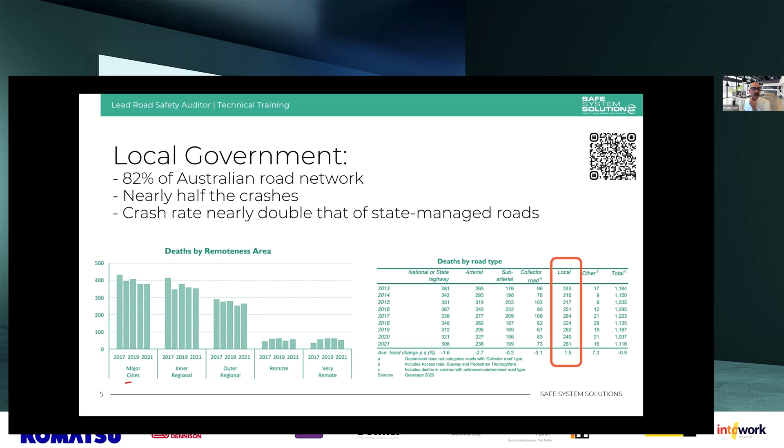Okay, let's get into the top 5 straight away. I've told you a bit about how we've done this analysis. The other thing to note is that while these treatments address the systemic risks on the local government network, we've also overlaid the real desire we have as a community to increase active travel and more sustainable travel, people walking and riding. That's especially overlaid into these urban treatments we're about to show.

At number 5, I'm going to show you one of the risks we're trying to address here. Hopefully that streamed for you - I'll play it again in case it didn't. Katie's giving me the thumbs up, but you saw that. Very scary footage there of a dooring incident. I mentioned my colleague Max - we were out doing a cycling audit around Melbourne. He had the 360 camera on videoing, and I just happened to have to avoid one of the doors myself there, which for those who ride a lot is a common occurrence.

This is only part of the systemic risk we're talking about for cycle lanes - roads with traveling vehicles next to the cyclist. We also have concern about vehicles drifting into cycle lanes or hitting cyclists one way or another. These risks combined are a serious safety concern, and they also discourage people from getting out and riding, especially those less confident in riding - these things really discourage that.

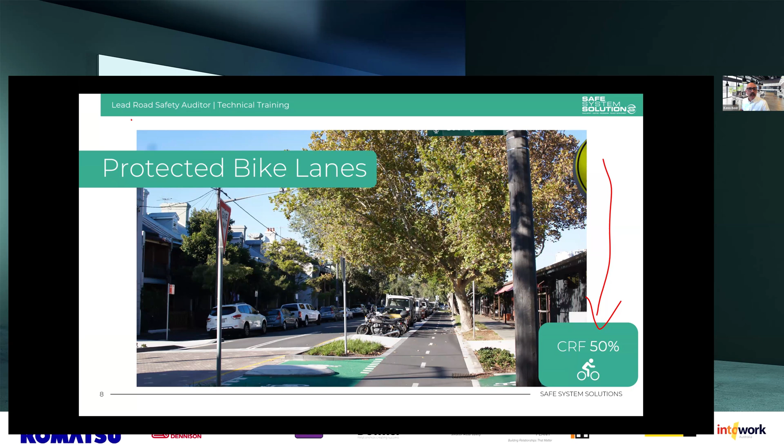You can't really do a crash reduction factor off just one data point—your statistical significance isn't quite there. So a 50% crash reduction factor for protected bike lanes, as I say, will vary depending on some specifics.

But the way you can do that varies. You can see here some concrete blocks used to separate riders from faster vehicles, also including the parking in this sort of Copenhagen-style bike lane where the parking is pushed out, so cyclists get to run curbside and away from any of that risk.

In the specifics of how you design these, there's all sorts of things to consider. Certainly intersections and access points are a real area of risk, and those need good sight lines. There are other little tricks, such as putting a raised surface or cobblestones at any turn-in point—there isn't one here, but I'll show you. This can really enhance that point, so a vehicle turning in has to significantly slow and hopefully then see riders as they approach.

Two-way Copenhagen lanes don't tend to operate as safely as single direction ones, just because of that surprise of a cyclist coming from the other direction for a driver turning in. But if you have long lengths without access points, these can be a really good treatment—especially if you're constricted on road width, since you only need the buffer on one side rather than both.

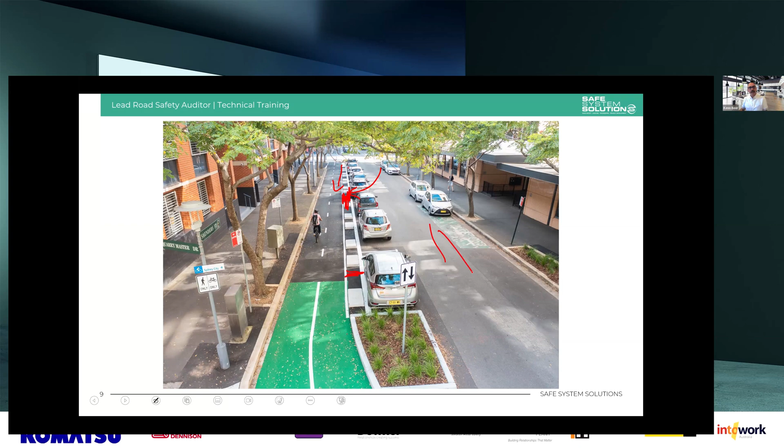There are lots of different treatments coming in. I had some wonderful discussions with Michael Langdon up in Queensland, who many of you know, about exactly where we draw the line and define something as a physical feature separating a bike lane or not. Michael's going to put out some information on that shortly, I think, because it is a little bit grey.

I'm really interested in some of these bolt-down features—quicker to install, lower cost ways of doing it. It can also be a way to get your community comfortable with it. We know some people might be concerned, so you can put it out as a trial, spiked down, and they're a little more comfortable knowing it could be removed if it's not performing.

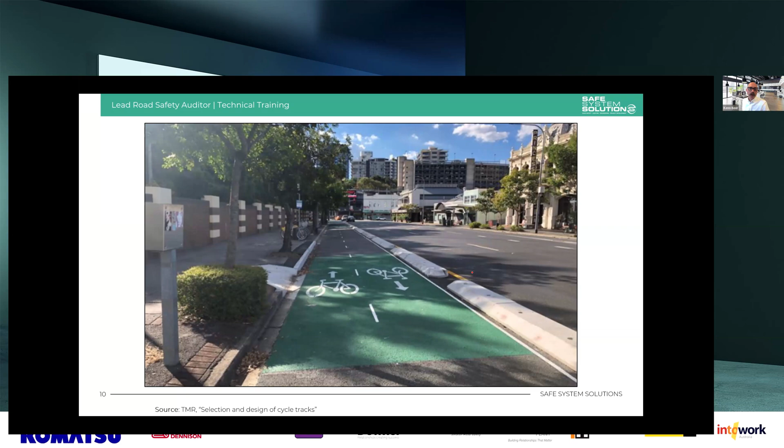These pop-up treatments we've been seeing, this is obviously a larger arterial road, but the idea is to start putting up pop-up infrastructure, significantly increasing cycling and safety perception as well. There's also opportunity to do some landscaping and beautification using different planting or the like.

Again, it's a bit about getting your road safety auditors involved and thinking about snagging and things like that, so working with landscape architects to make sure we've got a really safe design in there as well.

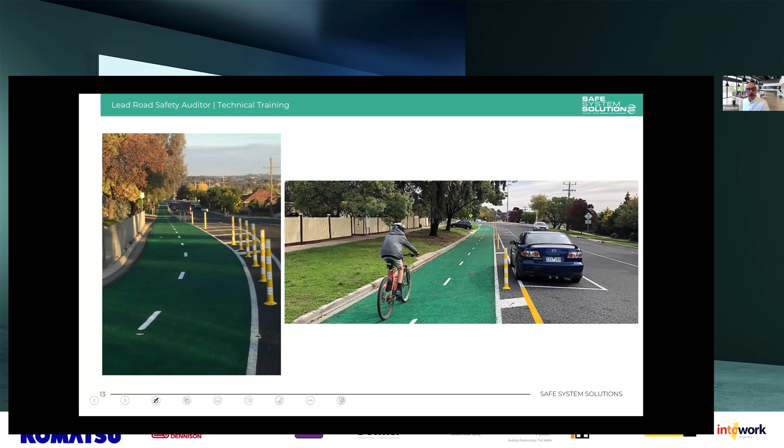Another wonderful example from Bendigo showing that you can take roads that have generous cross sections currently and are car dominated, and rearrange them to provide wonderful separated facilities for cyclists, getting more people on bikes in a much safer environment.

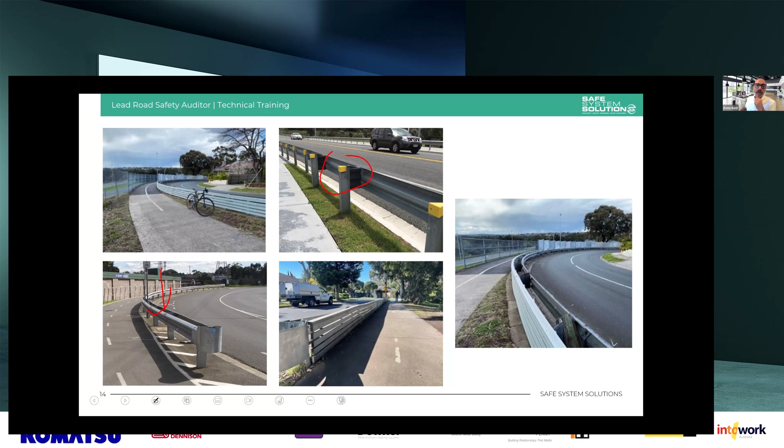If you use barrier systems to separate as well, that's a really wonderful treatment. I just want to flag the back of a W-beam system—there are many different types out there, but the back of a W-beam system can be a snag hazard, a sharp edge for a rider if they had to leave the path for any reason. So things like backing boards, a back-to-back W-beam system, or post capping as a minimum if you're doing that. But really, some of those back-to-back systems can work really well.

Okay, and at any point, Katie, you can jump in with questions if you have any.

Nothing's come through yet, Ken. Well everybody, feel free to pop your questions in the chat as we go—I'll see how many I get to in the time we have allowed, otherwise I will be able to follow up.

Okay, the next one I'm going to jump into here—another video showing the risk in action. Not to say we wait for crashes, but we're seeing these crossroads. Now these crossroads occur, yes, in urban environments, but also in lots of local government and rural environments as well, and we have bad angles.

We think about the angle of crash a lot. We have bad angles, we have bad speeds. There's a whole lot of looking into why these are occurring in terms of: are there see-through effects? Are there appropriate warnings? Is the signage good? How's the skid resistance, the surfacing, the line marking, and all these sort of things? Really important to be looking at and doing everything we can to minimize the chance this happens. But we do have to focus on the severity of the ones that are still going to occur, so we're going to try and minimize those crashes, but what happens when the crash or the mistake happens?

This is where I'm going to go to one that's not new, the old roundabout. The roundabout is such an amazing road safety feature when we think about that vehicle-to-vehicle collision risk. It also works really well for motorcyclists - not quite as good as cars, but really effective for motorcyclists as well. We give a crash reduction factor of somewhere around 60%, could be a lot higher than that just for cars, depending on whether it's a one-lane roundabout versus a two-lane roundabout, and how it's all configured.

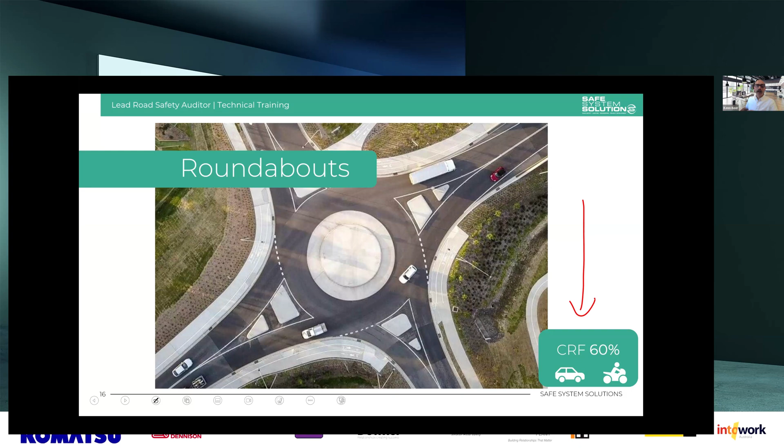I'm going to talk about pedestrians and cyclists at roundabouts a little bit later, because that's definitely something we need to work harder on. But in those areas where there aren't pedestrians and cyclists, out in your rural areas, or where there are fewer pedestrians or cyclists, just a generic roundabout is an absolutely amazing feature.

And why is that? Well, a bit of road safety engineering 101 for you here. Conflict points - a conflict point is a spot where the crash can happen, so you've got two vehicle paths that cross. You can see for vehicle-to-vehicle crashes at a single lane roundabout, there are just fewer conflict points. And the conflict points that are there are much friendlier - they're not those very harsh angles that can occur.

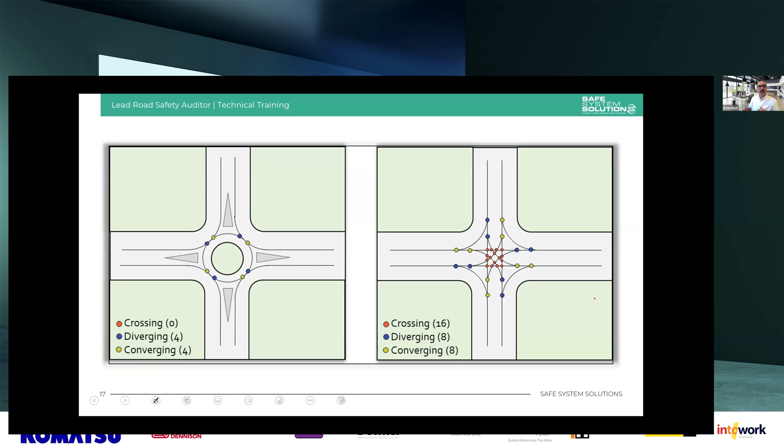So when people crash at a roundabout, there's a little bit of bouncing off going on, as opposed to a very harsh crash at speed. If you remember your vectors - I do a little bit of vectors with people in our training courses - but anyway, the resulting energy is dissipated outward more than it would be otherwise.

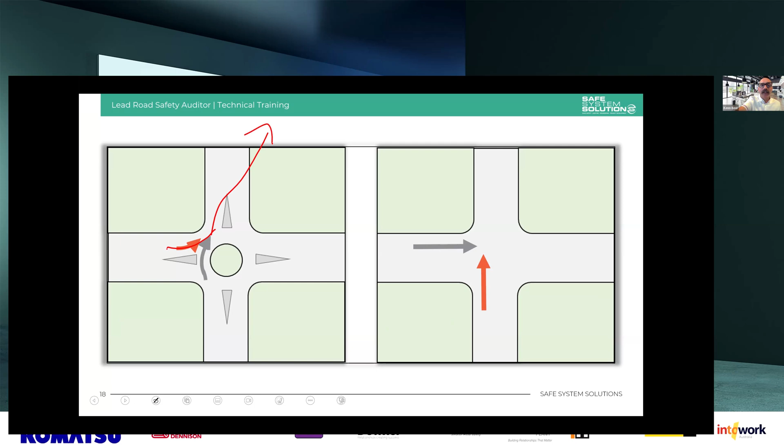The other thing is that people drive in all states of consciousness. They're half asleep, they're thinking about the fight they had with their partner, they've worked a double shift, maybe they've had a drink or two, they're just not concentrating. They will run straight through a give way sign or even a set of traffic signals, but they're far, far less likely to run straight through a roundabout. It's just got all these characteristics that wake people up, bring them back to driving, make them look around at a particularly high-risk spot. So that's a wonderful win in road safety.

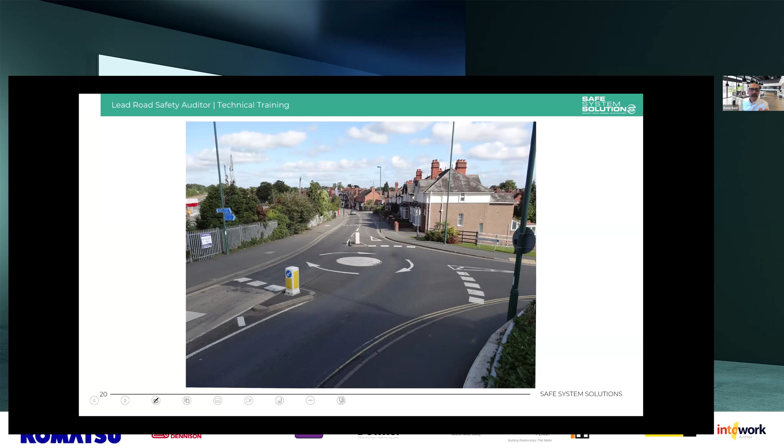And even roundabouts that are much smaller, and don't necessarily have those particular civil infrastructure features in the middle, do an amazing job disrupting ultimate priority. So a driver approaching from any direction at this UK mini roundabout, for example, will not think they can run straight through at speed, because they're going to have to at least look around. They might go through a little faster than we'd like, because we don't have as much horizontal deflection - we can work on that with some other ways - but that disruption in ultimate priority is an amazingly effective feature.

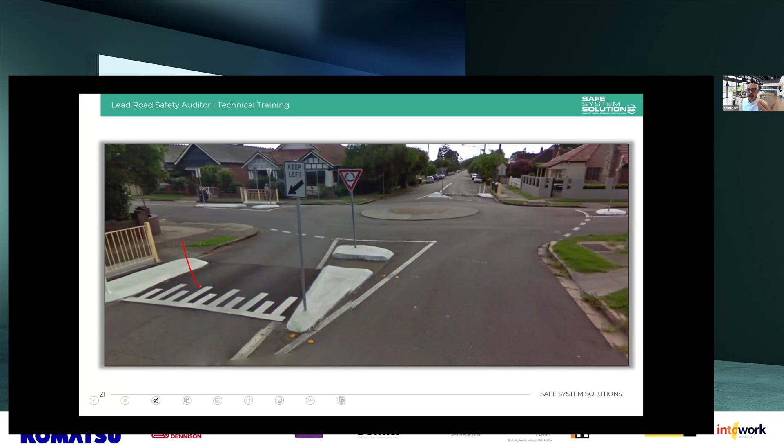And then the roundabout goes in, essentially with very minimal works - a wonderful feature. Cost under $50,000 at the time, probably a little more expensive than that now, but we're not talking about those sort of $500,000, $1 million - or if you get onto the arterial road network, you're up at $7-10 million, no worries, for a full-size roundabout, which is an extreme amount of money when we think about the number of areas we could treat for something like that. So there's another little bit of the compact roundabout - you can see some important features there, such as features to slow vehicles on the approach to the roundabout as well.

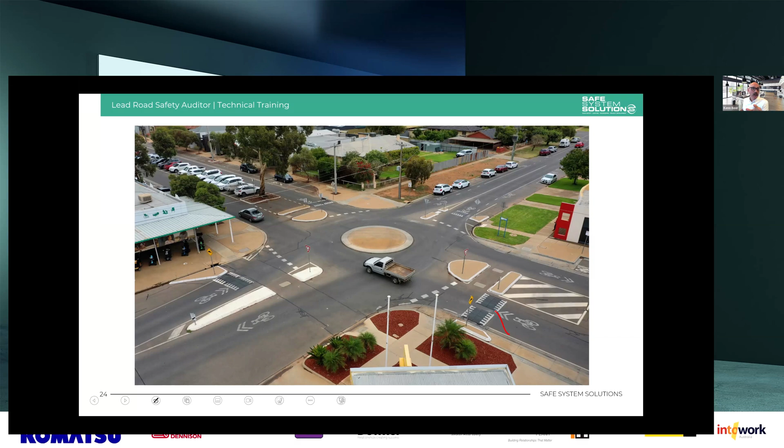I mean, this is kind of like the US four-way stop, just with a circle in the middle and a bit of speed calming on the approach. It's really what it is, but it's a spot of higher risk where people have slowed down, they're more alert, they're more awake. This one actually performs really well for pedestrians and cyclists as well, but I've got some other things to throw into the mix on that a little bit later on.

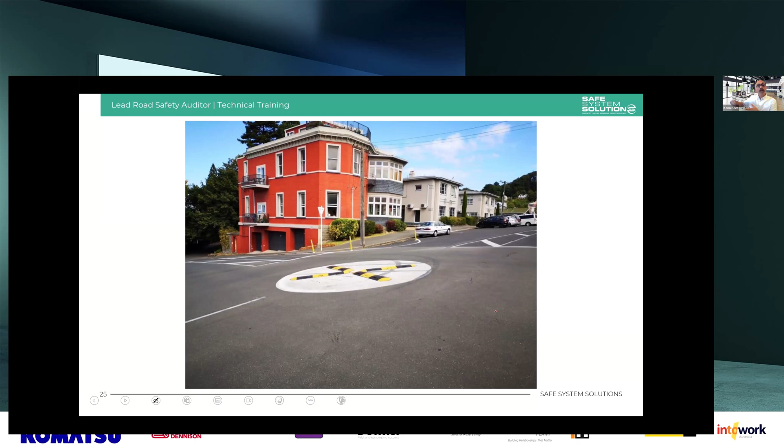Does it meet all of our design standards and performances and everything like that? No. But you really got to ask yourself, are we getting a safer environment for all road users than not doing this at all? And if that is the case, we are obligated to move this through in the best possible way we can. So lots of good features coming out.

Okay, at number 3, and now this one, I'm going to give you a little bit of an analogy to start you off here.

Got a high-rise building. Falling from the high-rise building, or let's push a car off the high-rise building. From the first floor, when they hit the ground, they'll be traveling at 30 kilometers an hour. Up on the next floor, we're at 40 kilometers per hour. We jump up a couple of floors to 60. It starts to spread out a little bit, 70, 80. We're up at around the 13th or 14th floor at 100 kilometers an hour. Okay? So that's just trying to bring us speed to energy to death potential. Get that mix in our head.

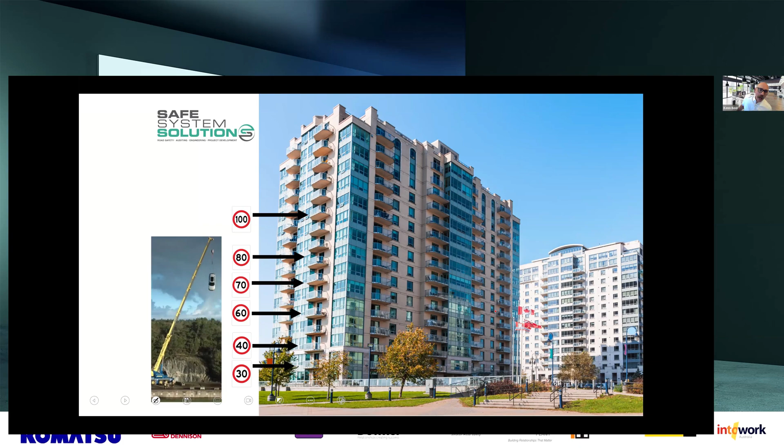Humans are really, really good at understanding energy and risk associated with falling from heights. Very, very bad at it on the horizontal plane. We just never evolved to understand that you could travel at 100 kilometers an hour. So our understanding of that risk is warped. But when we just put it on that vertical, okay, that makes a bit of sense. So we better just drop a car from, say, there around that floor, just to show you the impact force. There you go. But let's go up to the 14th floor, shall we? Oh, actually, before I do that, I'll show you a bit of side impact with poles.

Another interesting misconception is the amount that the vehicle can handle in terms of force. So you'll see the bottom video going sort of slow motion there. That's the ANCAP side impact pole test. So this would be the equivalent of pushing a car off the first floor and having it land on a pole just before it hits the ground. Okay, that's at 30 kilometers an hour. You can see the intrusion into the cabin, to the driver's area, 30 kilometers an hour.

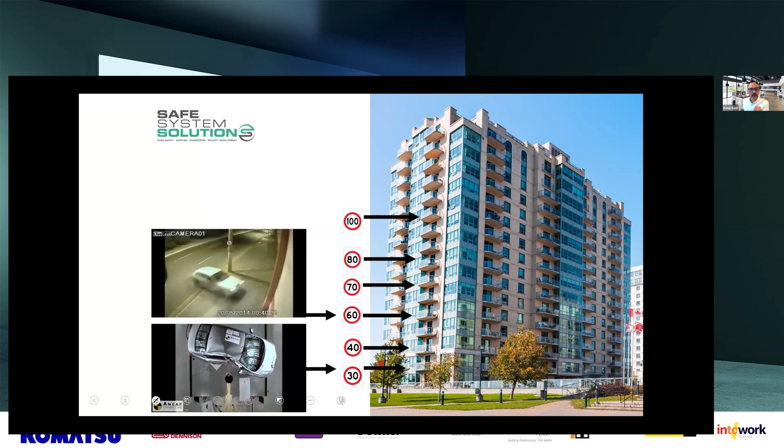If we do one at 60 kilometers an hour, and I sort of warn you now, this is a very violent incident you're about to see. At 60 kilometers per hour, the amount of energy and violence in that crash with a point source hazard is absolutely unsurvivable for the occupants of the vehicle. The best chance at survivability in these is that the car is ripped apart and that occupants are lucky enough not to be in the direct line of that pole as it slices through the vehicle. That's only impact speed at about 60 kilometers an hour. I shouldn't say speed limit here, I should say impact speed, by the way. People recognize that quite well.

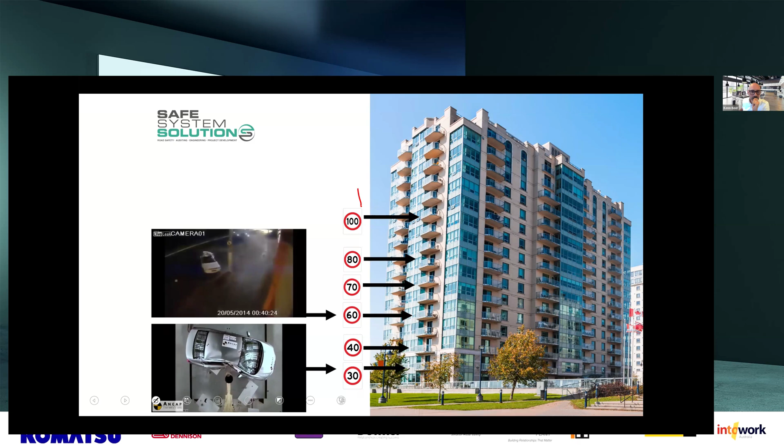60 kilometers an hour. But let's go up to that 14th floor, as I said. Okay, and so we've got a balcony on the 14th floor. And we don't say to people, okay, don't fall off the edge. And we don't put a white line there and say, okay, everybody always stay this side of the white line, because the forces are just unsurvivable. Humans are going to potentially fall off that.

We put up a railing as an absolute, because a fall is unsurvivable. We're going to do a physical railing here. We're going to try and make sure people don't walk out there and do too much of that, but the railing is absolutely essential.

I think you see where I'm about to go with this, which is to say that when it comes to a roadside and we've got trees and even rollover risk for that matter, what do we do? We either say just stay on the black stuff, or maybe we put a white line there and say make sure you always stay on this side of that. So it's a fundamental rethink in the way we think about roadside and median risk.

And what we need to be thinking is in a very similar manner. We need that railing, we need that barrier system, so when people make that mistake, they hit a barrier system rather than falling 14 floors or hitting a tree or the like. It also applies for the middle of the road, where a head-on crash is unsurvivable as well. We've got to think of that line just like the edge of the building.

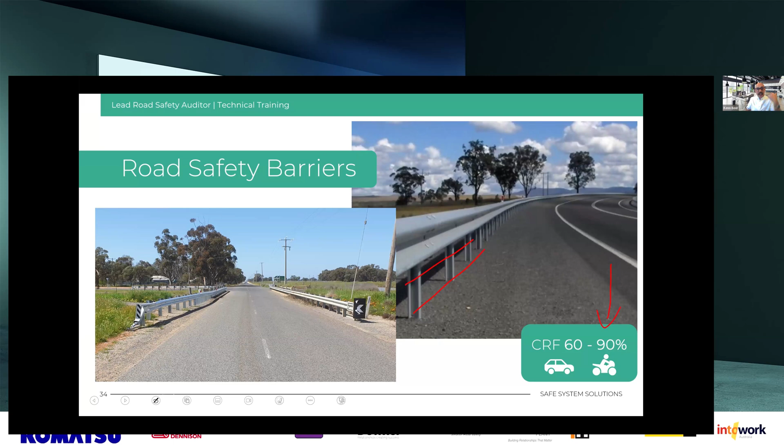Yes, it's going to cost a little bit more, and we can access a lot of government funding from state governments and federal governments for road safety initiatives, and putting forward barrier systems with these wonderful crash reduction factors makes a really good business case for that investment.

Now, just for the designers out there and those doing a little bit of thinking around roadside risk, I just want to flag the new Austroads Guide to Road Design Part 6, which does not follow clear zones. So if you're still thinking about clear zones, we're not following that in most jurisdictions. New South Wales is still following clear zone theory in terms of roadside risk, but I'm not sure what Western Australia is doing. I'm not even sure what side of the road they drive on.

And I joke, but I'm not sure what they're up to in terms of roadside risk assessment methodologies. Certainly Queensland, Victoria, South Australia are following the network roadside risk intervention threshold, which is a different risk assessment methodology for roadside risk. It has lots more science behind it than the old clear zone.

We talk about the significance of the hazard as well, in terms of it's very different to be hitting a pole versus hitting a building or hitting some frangible infrastructure. So you start to categorize the severity of the risk, the likelihood of the risk, and there's a bit more to it. It's a bit of a process, but it's something you should be getting your head around if you're in those jurisdictions.

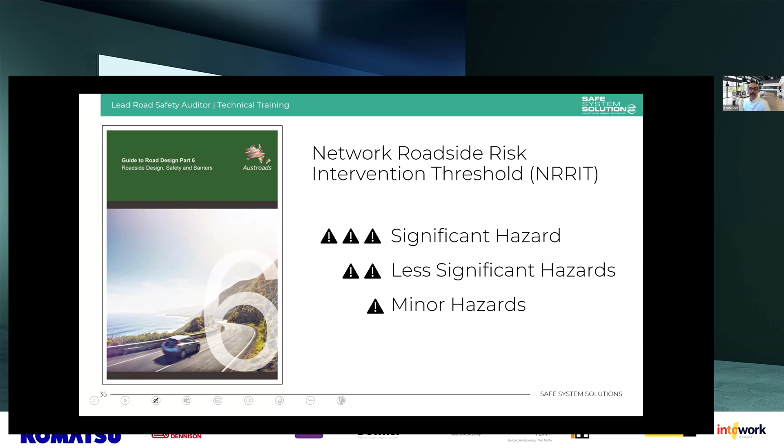I've got a couple of colleagues heading up to Rockhampton to have a chat with the council up there, do a bit of a training session on this process, barrier design, and start to unpack what this network roadside risk intervention threshold change means for Rockhampton City Council and how they can utilise this with the TMR requirements or adapt where they need.

Okay, going into number 2.

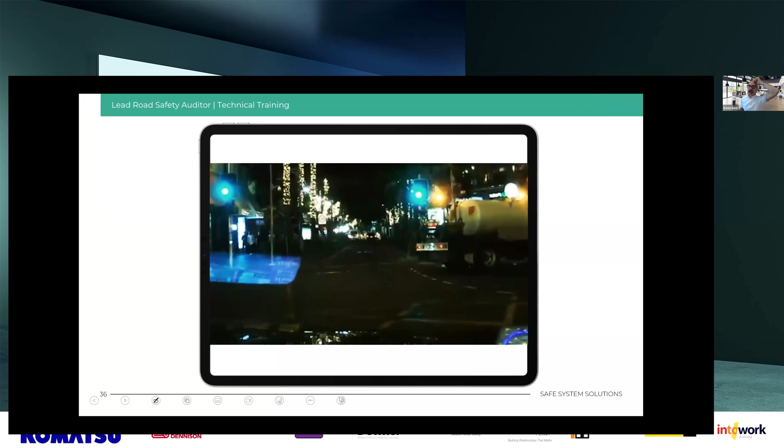Now, let's have a look at our little video here. Ooh. Okay.

So we've had a pedestrian make a mistake, as many pedestrians do. The vehicle is traveling at a low speed in a low speed environment. This is, as it says there, safe system in action.

We need to be absolutely clear that pedestrians will be walking on the road, making mistakes, running for their bus, intoxicated, trying to cross the road, pushing prams, walking around. That is what happens in these urban environments. And the motorized vehicle going through these environments needs to be at a speed where if something happens, it's well within survivable territory.

For far too long we've been in a blame culture of saying that pedestrian should not have done that, or they walked against the red. We're going to try to encourage people to be a little bit better in that perspective, but we absolutely need to get ourselves in the position of understanding it's going to happen, and our responsibility as those who manage, design and operate roads and streets is to ensure that when crashes happen, they're within tolerable forces for the human body, that it's not going to kill or seriously injure our community.

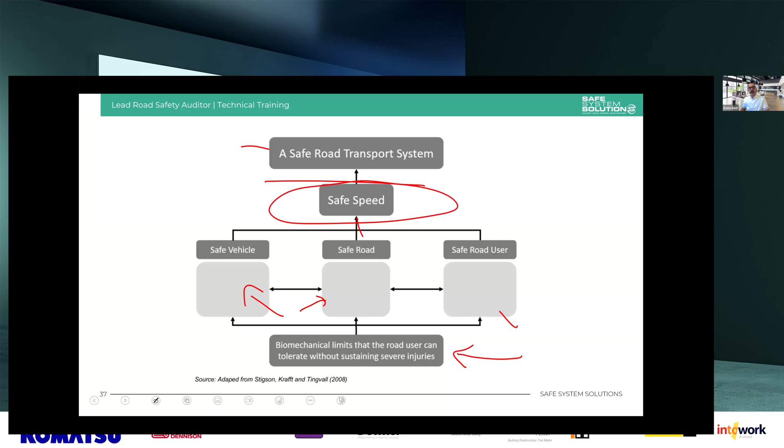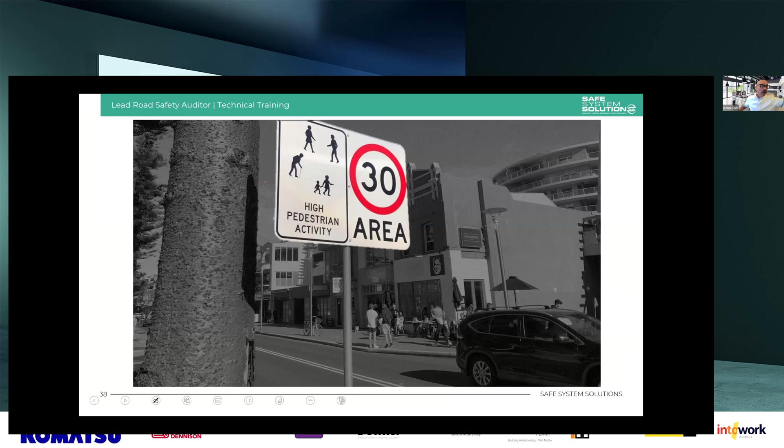Speed is the governor. So I've got area speed limits, and that's really what I wanted to put as number 2, is to think about area-wide speed limit reduction and getting that broadly across all these areas. I've got urban as an example there, but I also say that this should be applied to the rural network as well, thinking about whether we can manage risk across wide areas.

I'll pop this up because there are very tactical ways you can do this. Going one at a time at a speed zone reduction in an area with high risk is a real battle. And certainly you do that, and then you've got to get it through council, and you've got political pressures, and all sorts of community saying bits and pieces.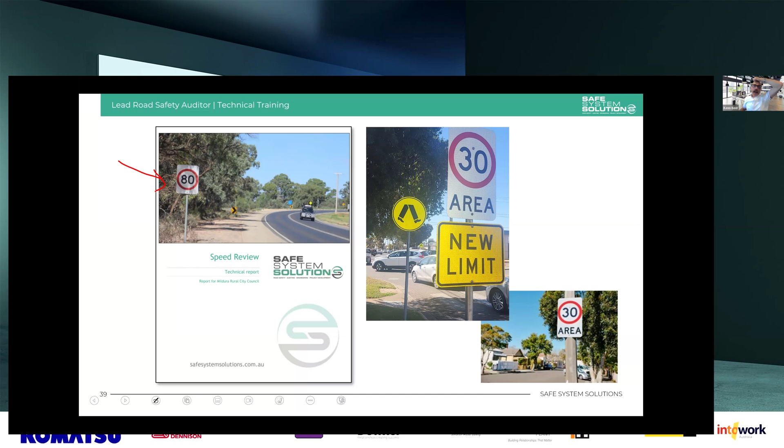And certainly it can be thinking about urban areas, and up in Mildura, the irrigation area, and then the wider rural network. You're able to start to map out, okay, we've got all these different risks, and this can be done with all sorts of methodologies, AusRAP, IRAP, IRR. Other people are coming up with different ways to do this.

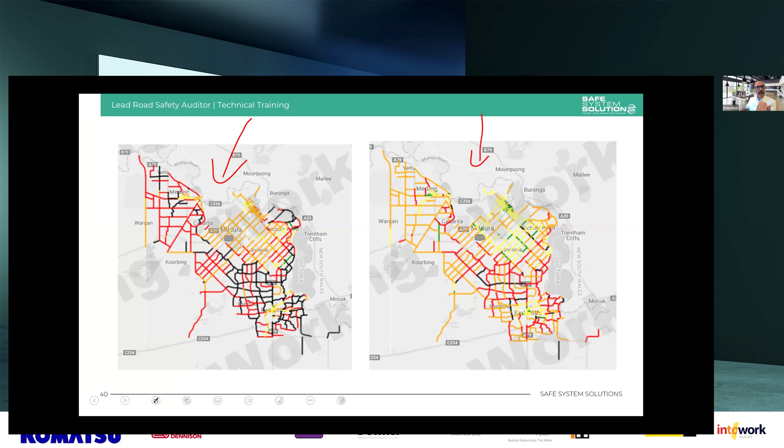So you can get a picture of existing risk, and then you can rearrange the speed zoning based on those risk areas, your movement and place categorization, and start to map out a future where you can see some significant risk reductions. We did that with the Mildura area, setting out some large areas for lower area-wide speed limits, and then looking at those irrigation areas and bringing them down from the default inappropriate 100 kilometers an hour down to some lower speeds.

And then you can take this through council. You need to set a platform for them to understand some of this, the risk associated with it, the benefits this will give in active transport. You get some of the community to advocate for it because they've got to walk on these streets, or their kids have to walk through these streets. They want to see this. You bring that sort of swell together. You can also even get your asset management people in, showing them it's actually going to cost less on some of this rural network with a little bit lower speed in terms of asset management.

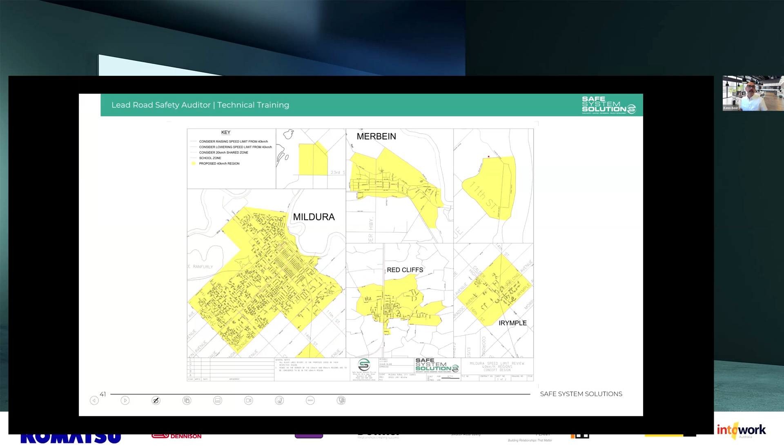We're going to take some people off running on our local government road because it's higher speed than the parallel arterial road. When we bring ours down, we'll move them to the road that's got the higher infrastructure, the big arterial road that runs generally parallel with it. So there's a lot we can do here, and we get wonderful road safety benefits, plus all the other benefits of more people walking, cycling, a healthier community, and lower emissions with these speeds as well. So it's just wins all round.

I'm really encouraging a lot of this 80 kilometre per hour approach in wide swathes of areas. I know some of the community aren't quite there yet, but Mornington Peninsula Shire Council paved the way for the last decade and more in this space.

They showed that actually a lot of the community do want these lower, more appropriate speeds on their rural network. It's just that if you go out to the public and ask, 'what do you think of us making this 80 kilometers per hour?' a lot of the feedback you get is that they don't want it. Why? Because the people motivated enough to write in are angry about this, they're motivated to do something. But if you do actual broad surveying of the community, random sampling, you discover you actually have huge support. Yes, there's people who don't want it, there's always people who don't want change, but there is a lot of support from them. They're just not those really vocal, squeaky wheel, jumping up and down people.

So taking that sort of survey data to your council can be an extremely effective thing to say, actually the bulk of our community want this. These people don't, but there's all this good to it, we've got overwhelming support, and here it is. Now you might be able to get those 30s to start with, but certainly area 40s are very well established across Australia and New Zealand. Even those have some wonderful benefits.

So the number 1, and I show this as what we don't like to see here. So approaching a pedestrian crossing, okay, a near miss there. It's a scary one. I'm going to play it again.

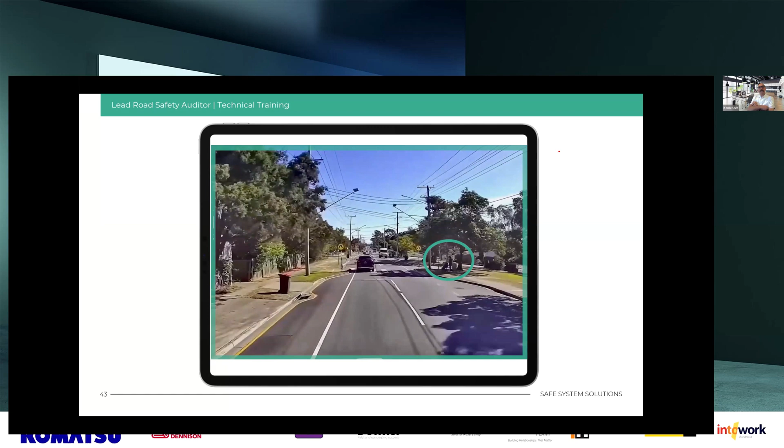Right, very scary. Now, the first thing I want to say is that a zebra crossing like this, a pedestrian crossing, officially called a pedestrian crossing, with no other features apart from the signs and the line marking, is not a road safety feature, okay?

It may have some benefits in terms of getting a few more people walking, but it is not a safety feature in the sense that we assign it zero as a crash reduction factor, sometimes negative.

Now, I predicate that on the fact that it's in these medium-ish speed environments. In very low speed environments, great, you've already got the low speed, general good safe area. These are fine crossings. But in these sorts of environments and high speed environments, as they sit in that photo, they are not a safety feature and can cause real issues where we have pedestrians who do have right of way walking out, and vehicles distracted, going at speed.

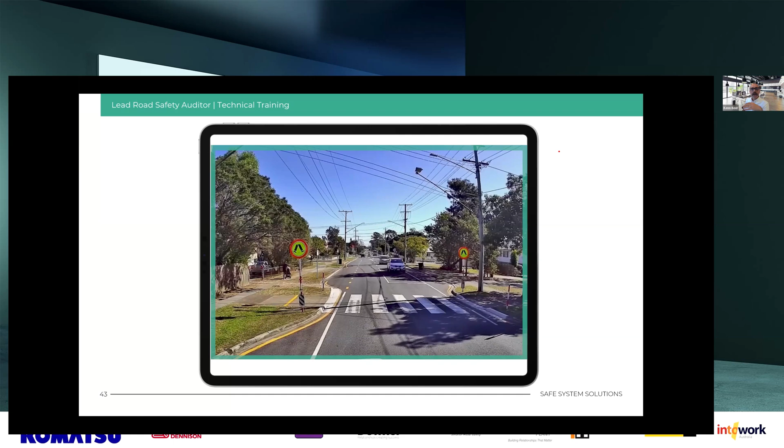So, of course, the big safety feature that we have in our toolkit here is the raising of that crossing. And it makes the crash reduction factor go up to around 60 or 70%. And that's for pedestrians, and if you have them for shared path crossings or raised cycleways as well.

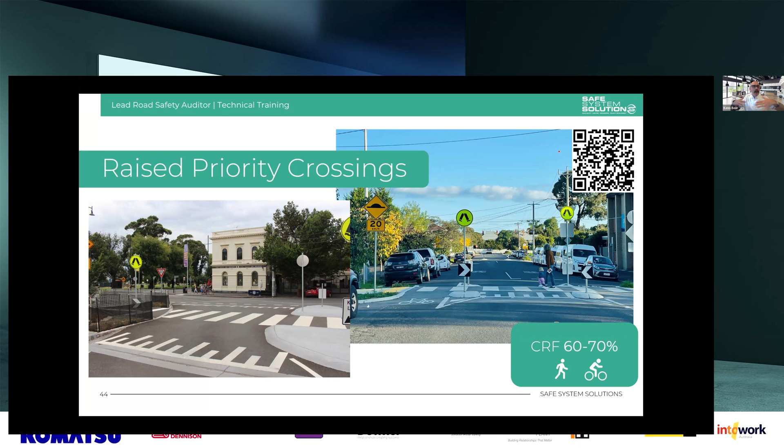Absolutely outstanding feature from that perspective, to get people walking, to provide accessible crossing points so people in wheelchairs, vision impaired people have that nice crossing. Just a wonderful, wonderful feature.

I talked about roundabouts before and some of the challenges. Raised crossings around your roundabouts - absolutely brilliant.

In these CBD areas or residential areas, moving vehicles through there at pace is not the priority, okay? People immediately, when they see this, go, oh, that's going to congest the roundabout, the saturation, level of service, right? If your priority is to pump as much traffic through the middle of your CBD as you possibly can, that's a very interesting strategy to go with, and it would go against a lot of other strategies your council is likely to have.

It was great to see, I think it's Bundaberg City Council, putting one of our fact sheets up on their website to try to help their community understand some of the benefits of raised crossings, raised intersections, raised features. And I put a little QR code to that. Feel free to do that.

And we want to encourage the community to understand a bit more about this.

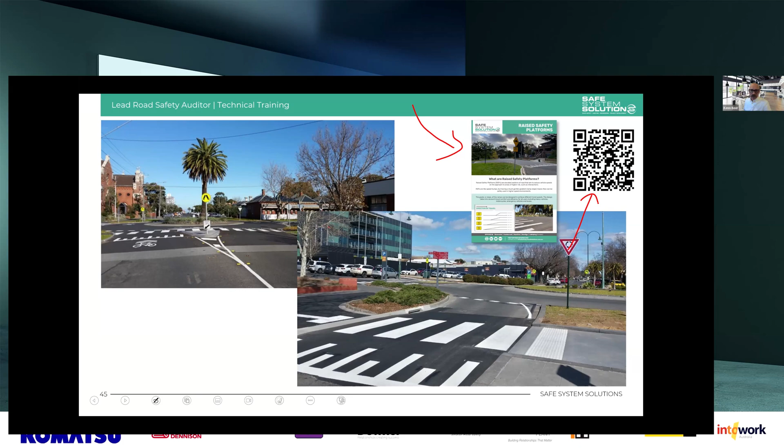Okay, the design of these comes with all sorts of things to think about. Some of you have done our raised crossing principles course and raised crossing design course, where we get into the nitty-gritty detail of civil design - everything from the ramp grades, the lighting, the drainage, the pavement, the specifics around positioning, where do we position these in different points. I was having a great discussion this morning for a couple of hours with Andy Irwin from over at Auckland Transport about vibration and soil and the like associated with raised platforms.

So lots to think about. But I go back to that point I made before, our responsibility is to understand: is this going to provide a safer environment? Even if we can't meet all of the specifics we're trying to in all of those different design guides and standards, and we say we're going to provide a safer environment still, we will do some design exception reporting to really confirm we're providing a safer outcome for our community, even if we haven't quite met everything. But it is far, far, far better than doing nothing.

Okay, so a few pictures there. If you find yourself in scenarios where it's absolutely unachievable to do the raised crossing because of a drainage issue, or - I was going to say buses - absolutely not an excuse. Buses can absolutely easily navigate over raised crossings, a 75 mil raised crossing, no worries. I've got lots of designs of that and they work perfectly well. So don't let the buses be an excuse. But drainage sometimes, I know, and cost and things.

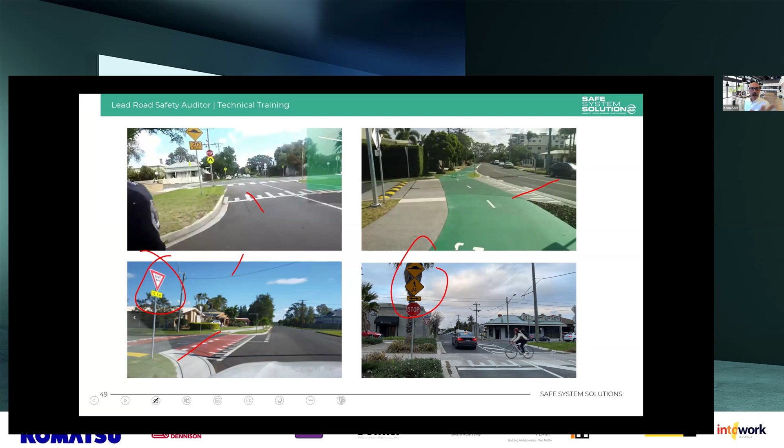We're going to get some consistency there. But in our last few minutes, and I will take any questions until we have to end this, I actually threw another 5 in. So I went through these 5, but the ones that we were really wanting to put in as well: raised intersections, rumble strips.

Local area traffic management as a general category is always wonderful in those local areas to complement those lower speed limits as well. Side road activated speeds.